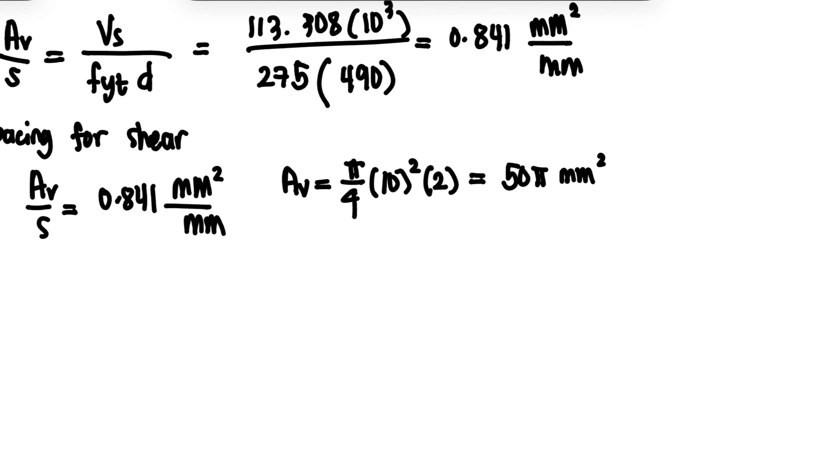Para naman sa spacing, itong spacing na yan na S, yan yung spacing for shear. Meron tayong 0.841. Yung AV is 50 pi, over S. Ito yung S na para sa shear.

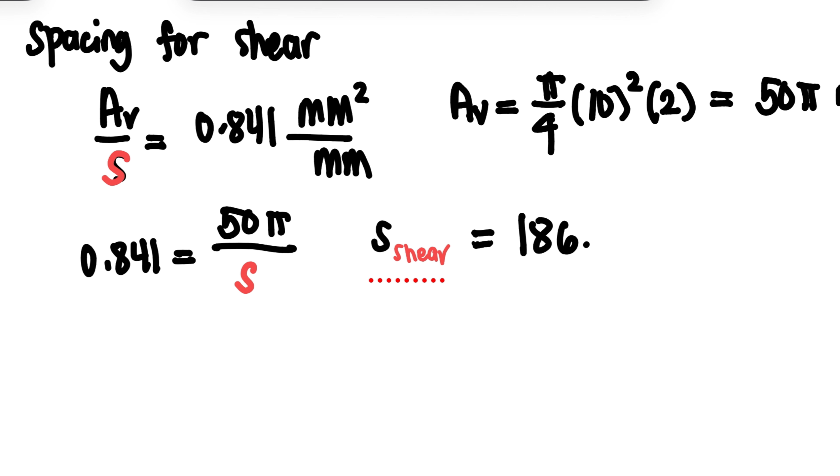Hindi, si ano na, wala yan. Maabot din kayo, relax lang kayo. Kasi pa... 186.77.

Meron na tayong spacing for shear. Actually, kailangan din natin i-compare ito sa 1/3 FC prime BWD. Ilan to? Murillo. Very good.

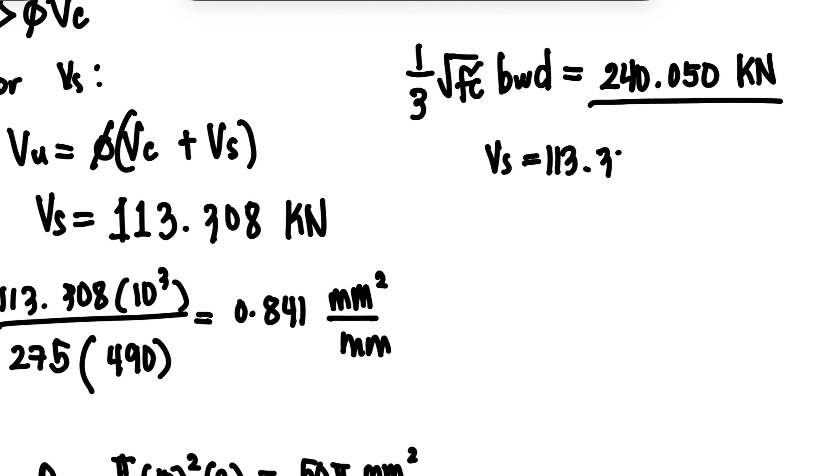24. Ilan? 240. Point. Kilonewton. So meron kayong 240.05. Yung VS natin is 113 lang. So this is less than 1/3 FC prime BWD.

Para sa spacing naman, S max natin is equivalent to D over 2 kasi less than, o kaya naman 600. Yung D over 2 is 490 divided by 2. Ilan to? Oh sige, sige, Bense. 245 mm.

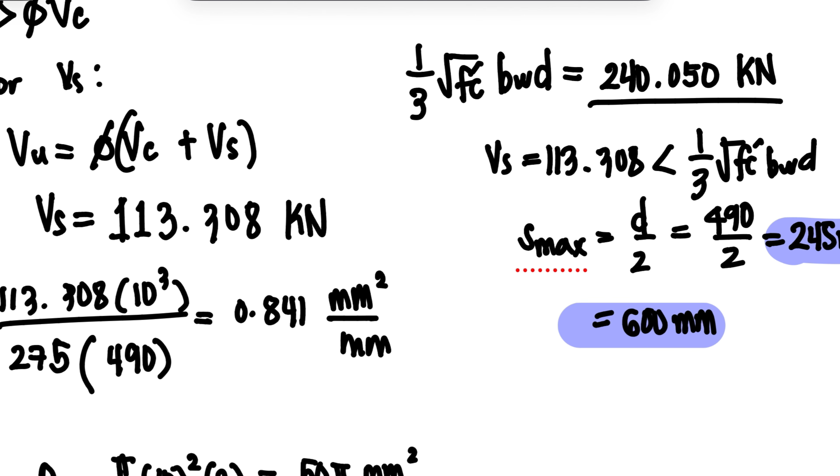So bala, meron tayong tatlong spacing para sa shear. So pinakamaliit, syempre yung...

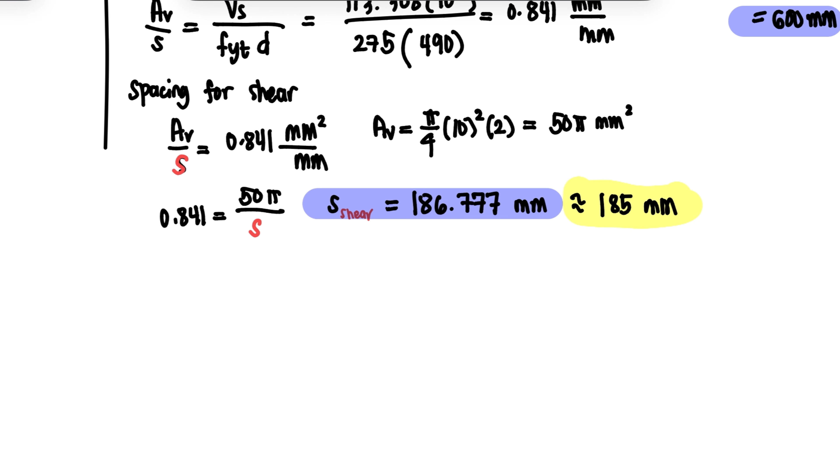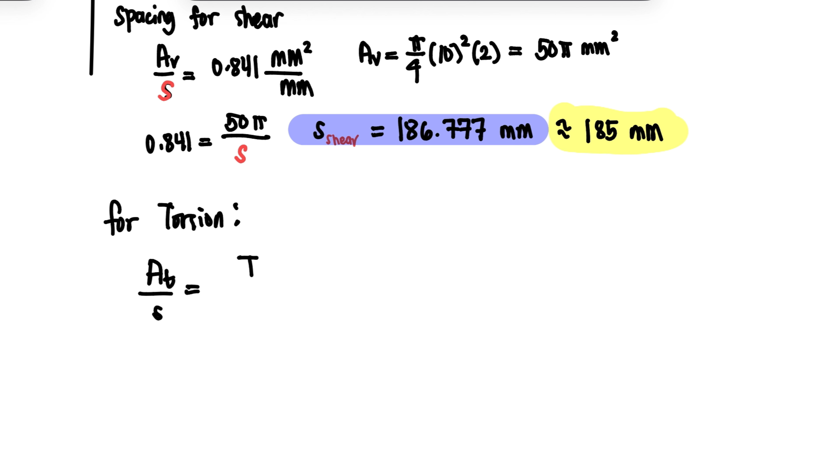Okay, proceed tayo. We have, for torsion. For torsion natin, meron tayong AT over S. This one is equivalent to TN over 2 A sub O FYT cotangent theta.

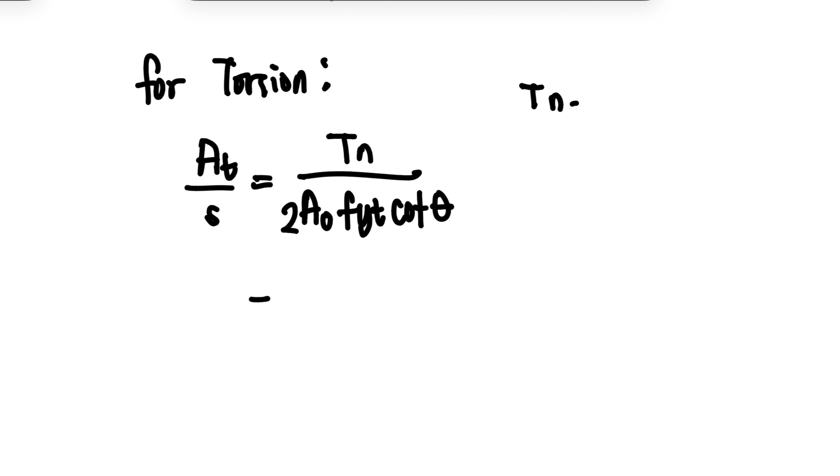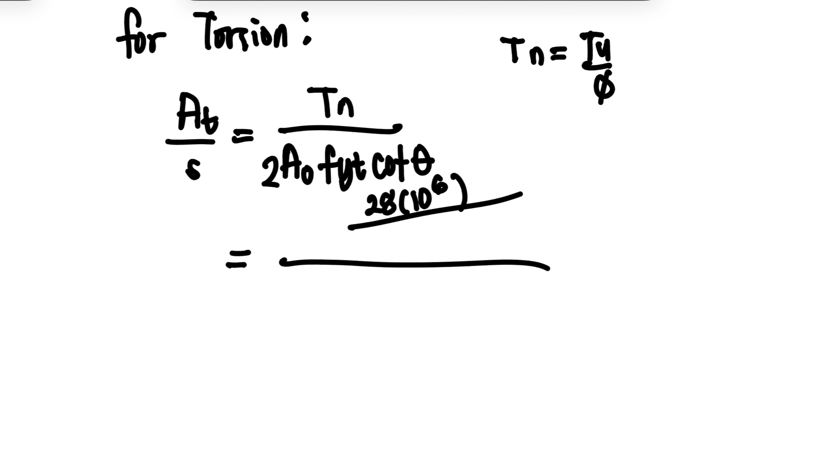Tama? So we have TN is equivalent to TU over phi. So bali dito meron po tayong 28 times 10 raised to 6 over 0.75. And then meron tayong 2.

Yung A sub O natin is ito po, 82,110. FYT is 275. And then yung cotangent theta is 1. This one is equivalent to 1. Kung may given, ilalagay nyo cotangent, kasi 45 degrees.

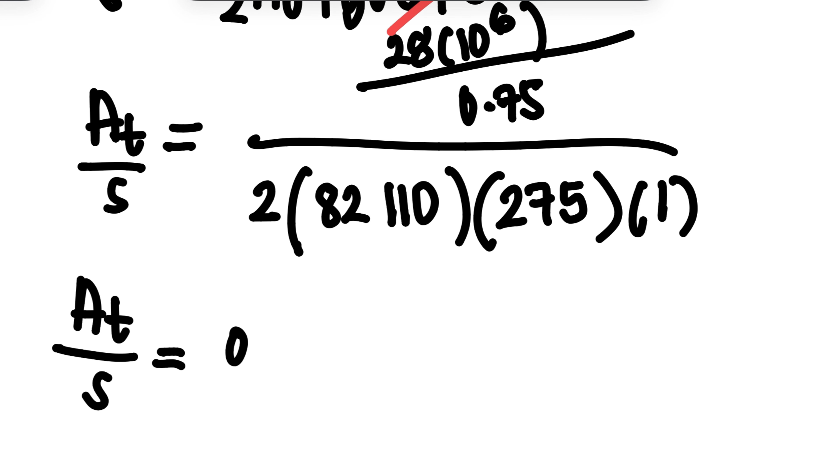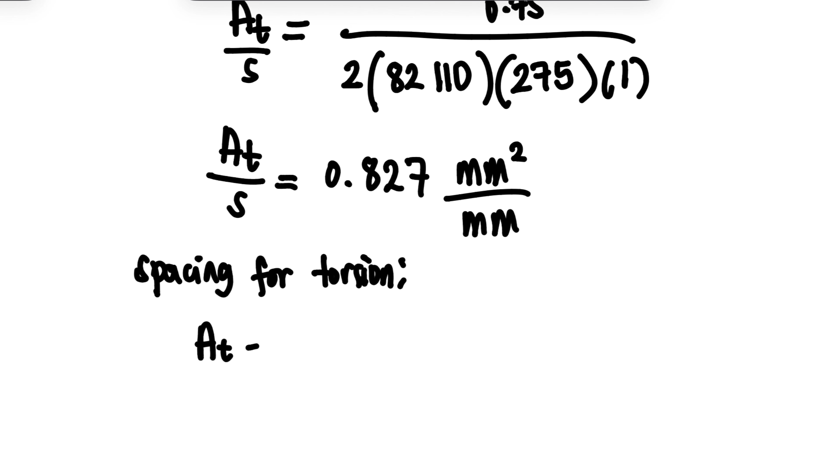Now, check natin yung spacing ng sa torsion naman. Spacing for torsion. Meron tayong AT, yung AT is for one leg only. For one leg.

Torsion, kaya we have pi over 4, 10 squared. So this one is equivalent to 25 pi. So para sa AT over S, meron tayong 0.827. Yung AT is 25 pi.

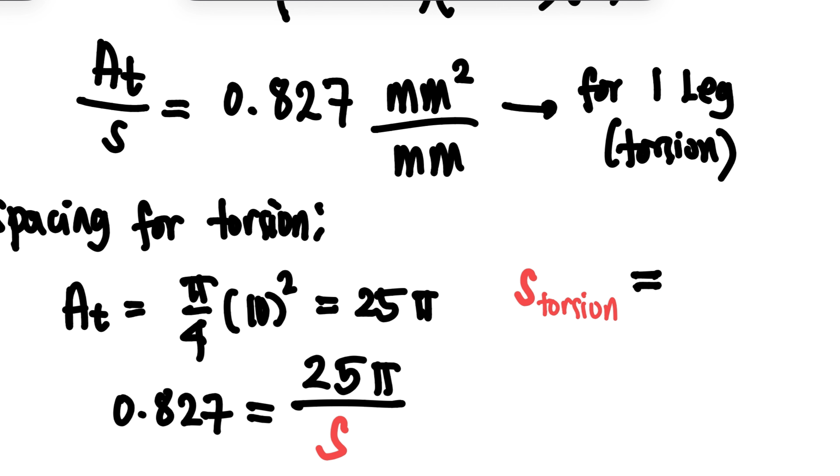Yung S natin is unknown. This one is for torsion. So yung S for torsion is equivalent to 94.97, 97. So this one is equivalent also to 90 mm.

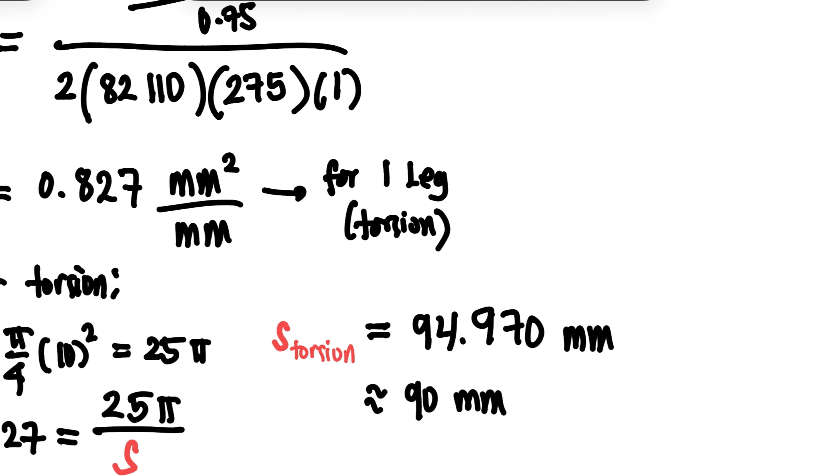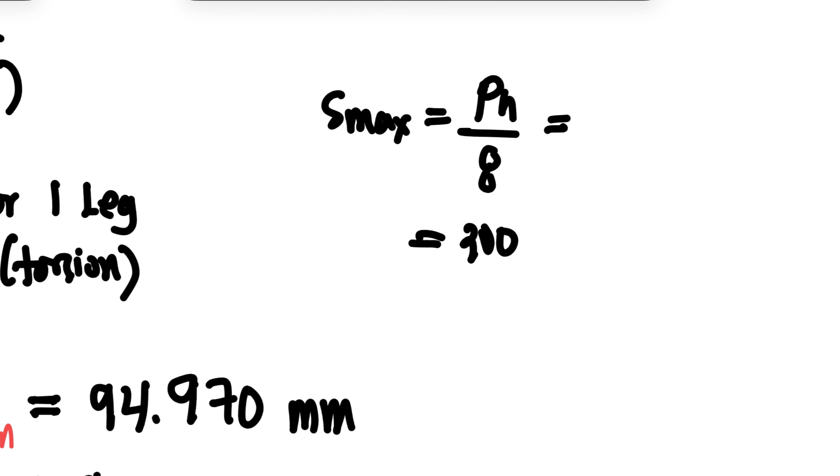So hindi pa din to tapos kasi kailangan natin i-compare ito sa S-Max for torsion na meron tayong PH over 8 and 300. So para sa PH over 8 ako, yung PH is equivalent to 1340.

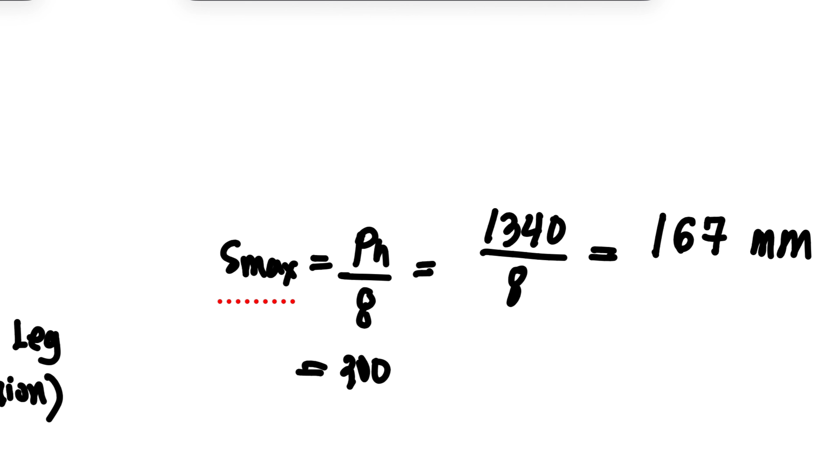So para sa last, meron tayong combined shear and torsion. Total na to, no? So we have AV over S. This one is for total.

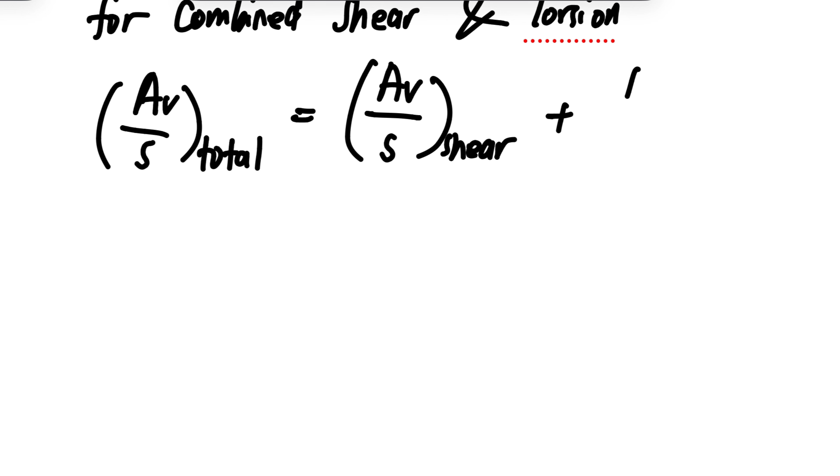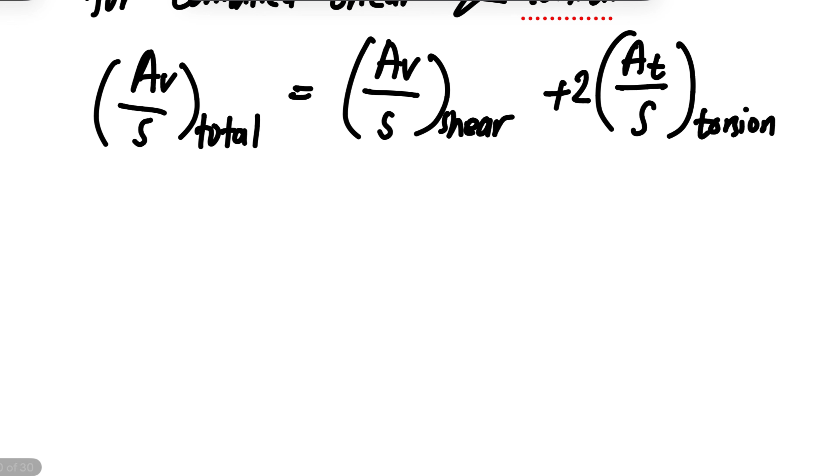Meron tayong AV over S para naman sa shear, at AT over S para sa torsion, times 2 kasi dalawang leg. Okay? So para sa AV, meron tayong 50 pi. Kaya ang mangyayari, we have para sa S total, ilagay na natin 50 pi over S.

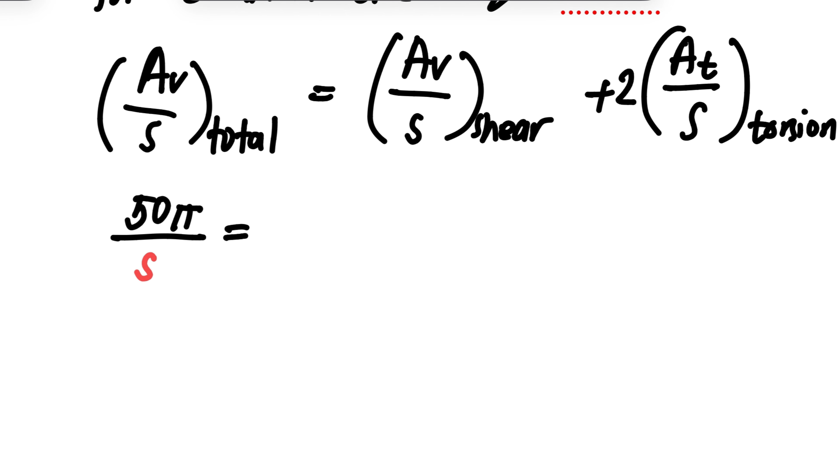Yung AV over S natin is ito. Madepende po yan sa number of legs. Depende kung 3 yan. Yes po, kasi yung AV, depende naman siya sa formula ng AV.

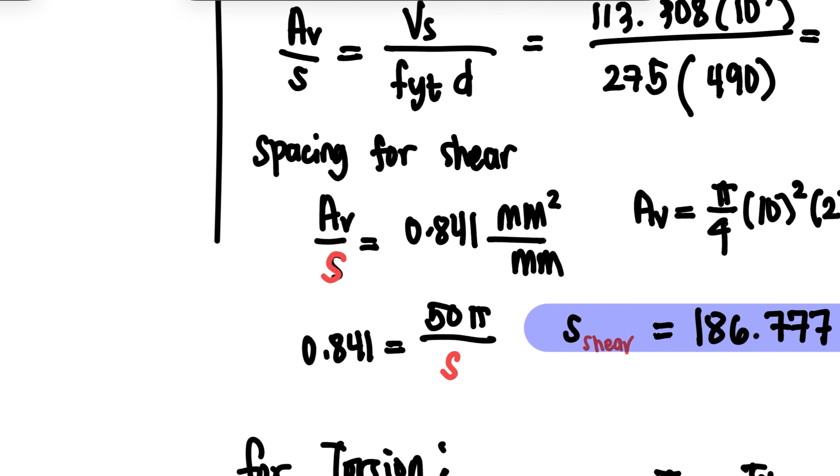So para sa AV over S, meron tayong 0.841. Tapos sa AT over S naman, meron tayong 0.827. So kung ilalagay natin siya dito sa ating formula,

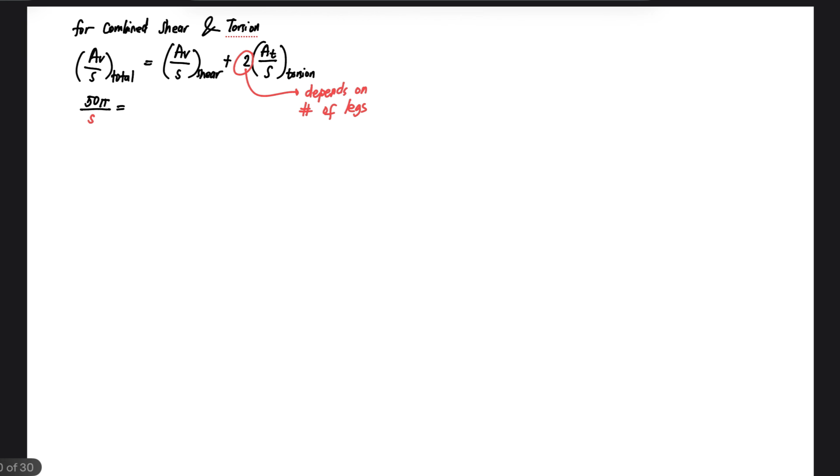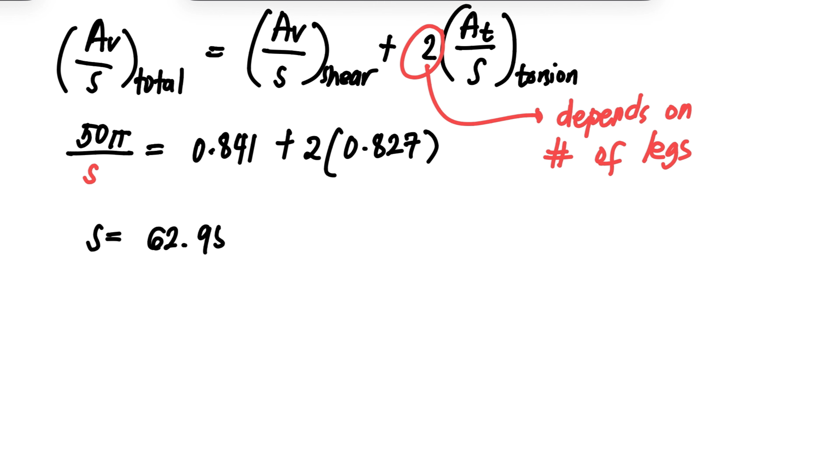dalawang 827. Yung S is 62.958. Or this is equivalent to 60 mm.

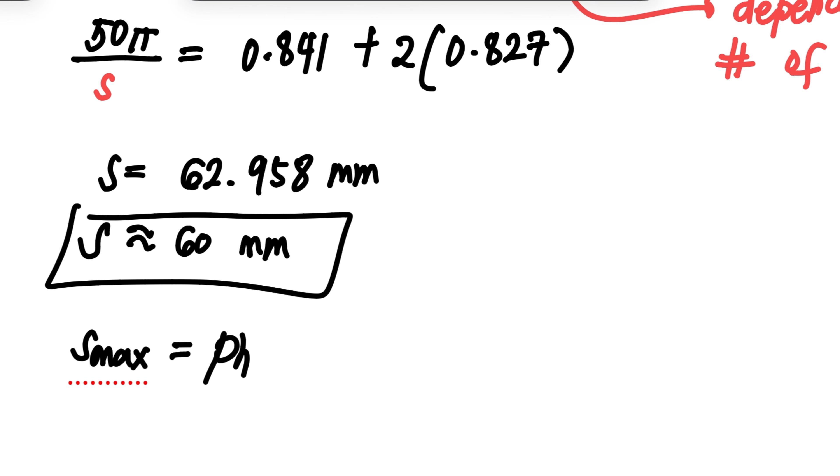So para doon sa mga S-Max natin, meron tayong S-Max for shear, tapos S-Max for torsion. Isulat na lang natin dito, PH over 8, 300, meron din tayo ditong D over 2, tapos 600.

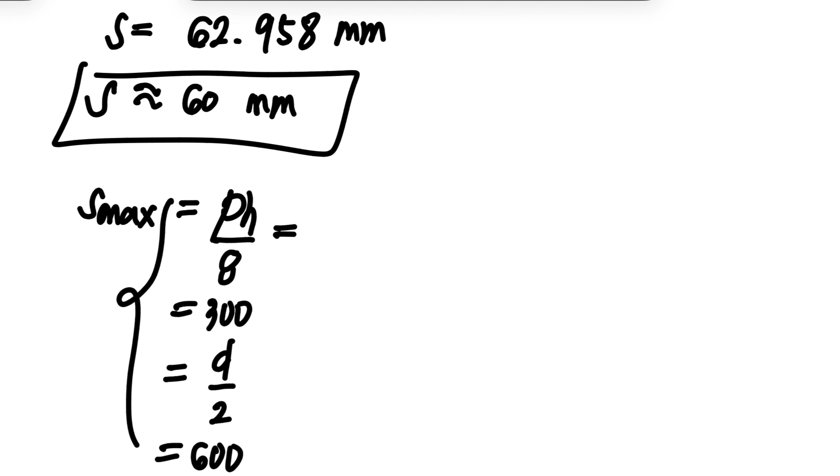So PH over 8, ito yung lahat ng S-Max no sa combined shear and torsion. Ito yung para sa torsion, ito naman yung para sa shear.

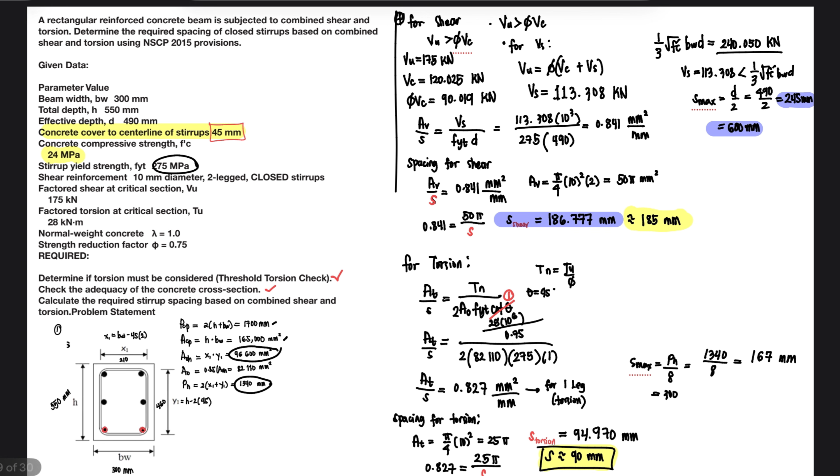So yung PH over 8 natin, ilan nga yun? 167. Ito naman 300, yung D over 2 is 245. Tama.